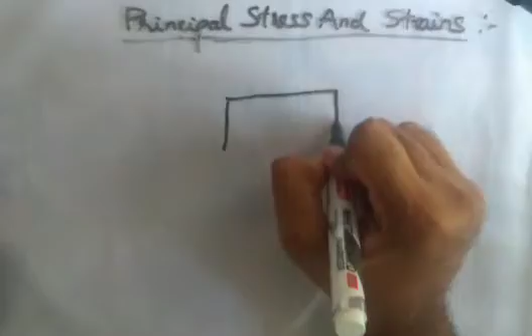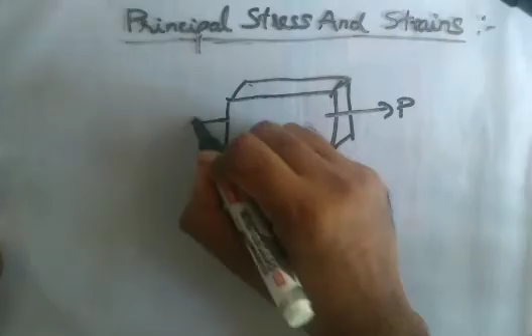Now, what is a principal plane? A plane in which only forces act normally and no shear stress is called a principal plane. It may be a compressive load or a tensile load, but it should act normally, that is perpendicular to the plane, is called a principal plane.

In principal plane, tau is equal to 0, that is the shear stress is 0. If they ask a question about the value of shear stress in a principal plane, then it will be 0, we have to take 0. This kind of questions will be asked in SSC, JE and junior examination levels.

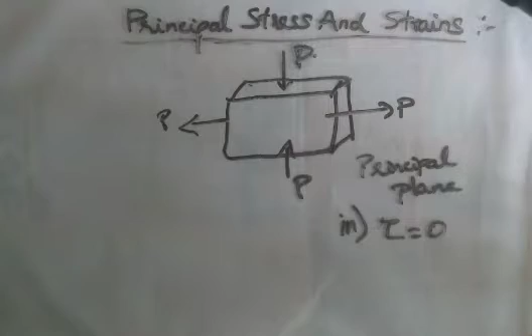Now, we have applied a force in this principal plane. On application of force, what will happen? The material will experience some stress and strain. That stress and strain in the principal plane is called principal stresses and principal strain.

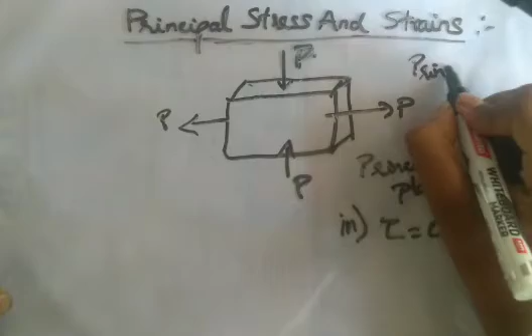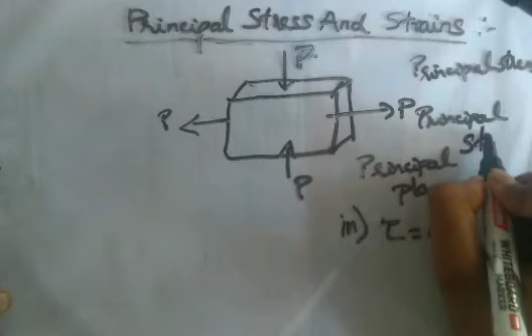You should always note that in principal planes, forces act normally and the stress acts normally. There will be stress resulting only in the normal direction, perpendicular to the application of force, and there will be strain also in the normal direction. These are the points, and the shear stress is always 0. You have to always remember these points.

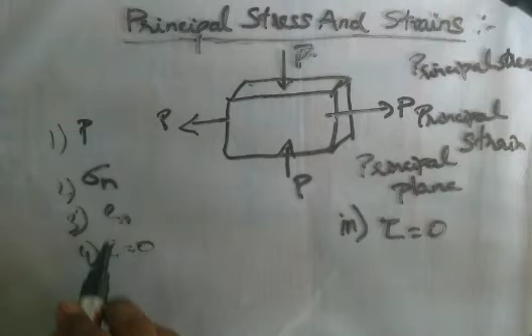Now let us see what is an oblique plane. Let's take a plane.

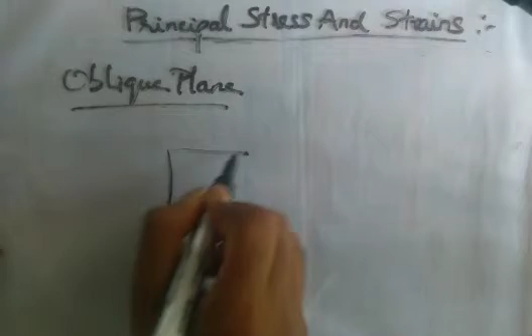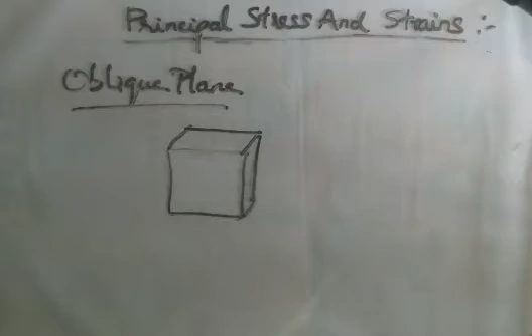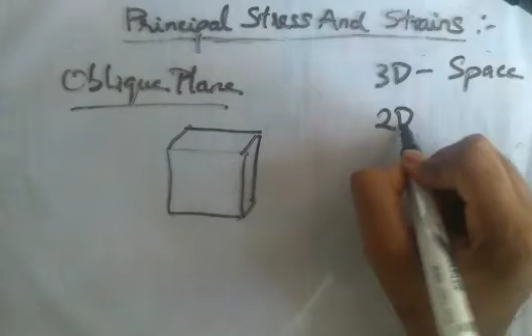First, do you know the difference between a plane and a space? If we consider a 3D object, we will take it as space, we mention the word space. If we consider it at a 2-dimensional level, we will be considering it as a plane.

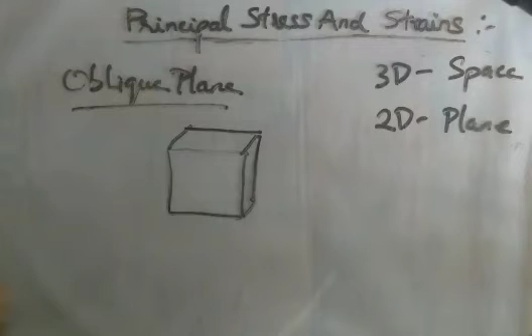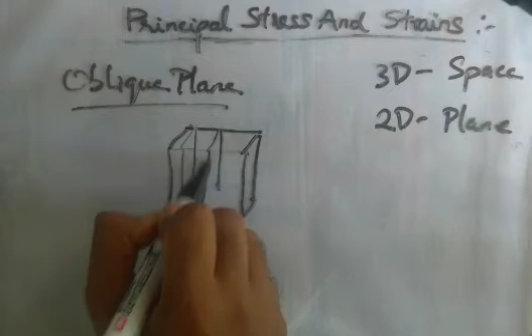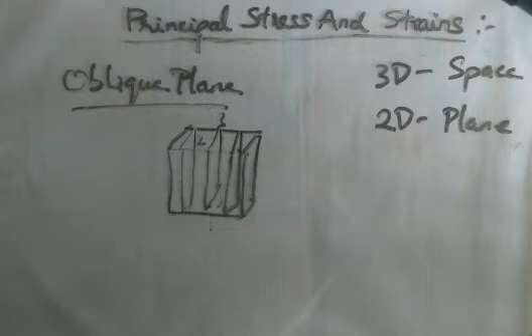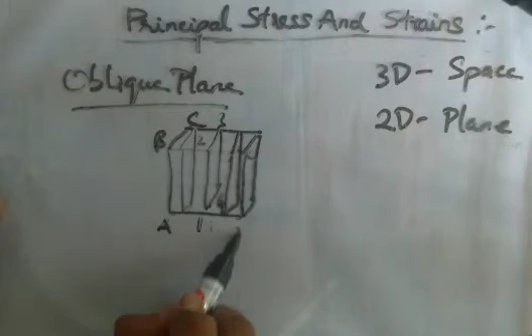Consider this as a rectangular or square section, anything. We will have here a number of surfaces, number of structures, number of layers, and these layers we can take as surfaces also. From that, we are considering one such section, 1, 2, 3 and 4. We name this as A, B, C and D. Let this be E, F, G, H.

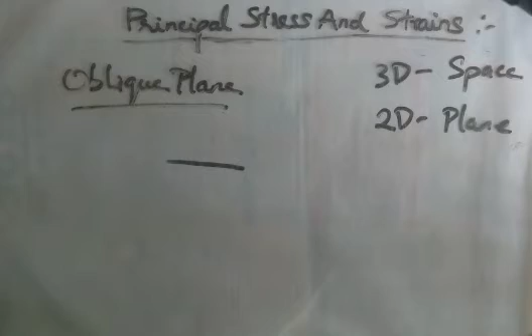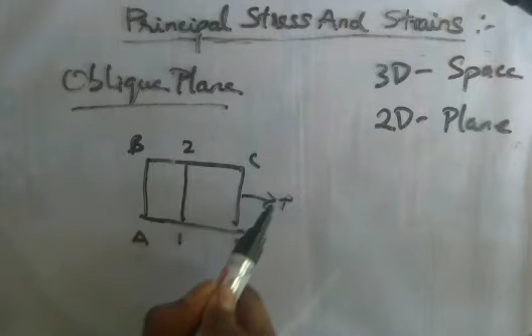We are just seeing from the front view, so I will draw only A, B, C, D. Let there be a surface here, 1 2, considering only from the front view, and we are applying a force normally. We can apply tensile or compressive, but normally in the normal direction to the plane. Now what happens? This plane will experience a normal stress and there will be no shear stress.

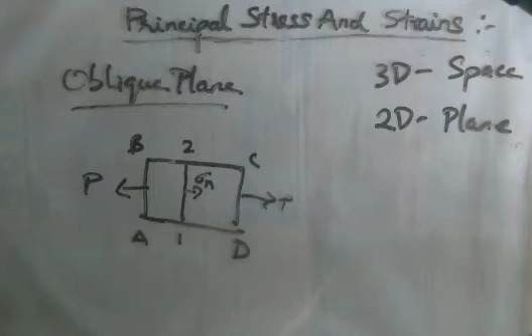Now we will take the same plane and we will incline it at a degree theta, at an angle theta. Let this be 1, 2 dash.

On the application of the same force, on this section we can consider this force acts in two different directions. One, it will be acting normally, and another, it will be acting shearfully, that is, parallelly. Parallelly means shear, that is tangential force. One will be acting perpendicular to the plane and the other will be acting parallel to the plane. This will be called shear, and here we will call it normal stress, normal force.

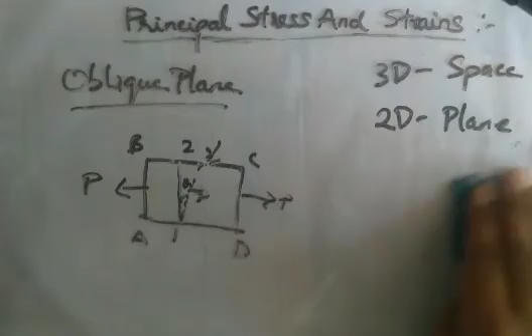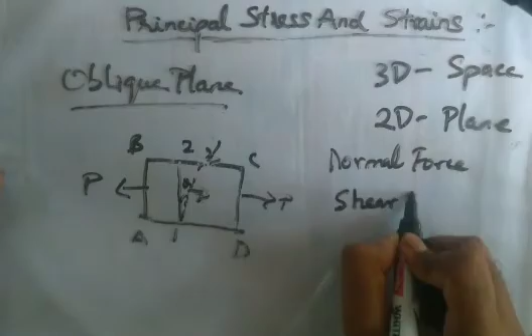So we can resolve this force into two components, that is normal force and shear force. The force only acts in this plane. This inclined plane, if we incline a plane, that plane is called an oblique plane. Always note that theta will be with respect to this plane, not with this plane, only with this plane.

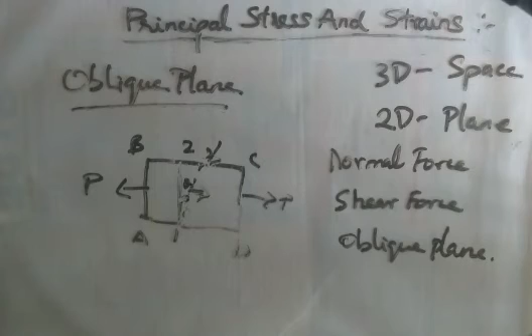For solving this stress and strain in this oblique section, we can calculate by two methods. One is the analytical method, second one is the graphical method.

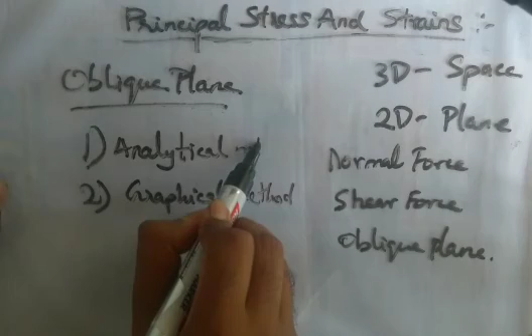We have seen the introduction for these principal stresses and planes. In further sessions, we will be solving the analytical method for these oblique planes and the graphical method for oblique planes, and I am going to introduce new sessions on how to solve GATE questions on strength of materials.